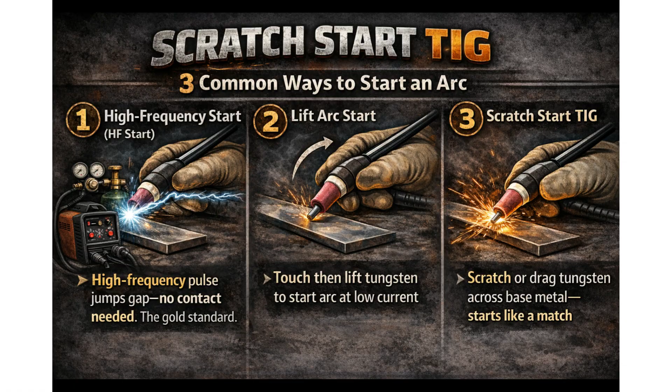Now, there are three common ways to start that arc. Number 1, high-frequency start, or HF start. The machine sends a high-frequency electrical pulse that jumps the gap between the tungsten and the base metal, no contact required. This is the gold standard.

Number 2, lift arc start. You touch the tungsten to the metal, then lift it away. The arc starts at very low current to protect the tungsten.

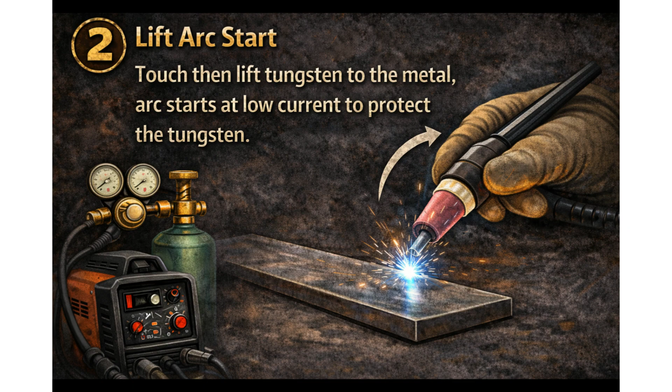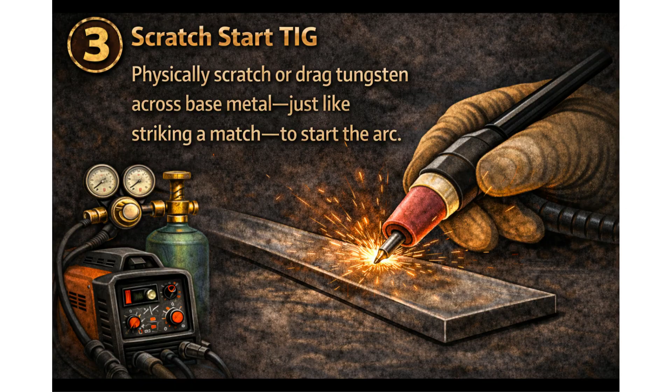And number 3, Scratch Start TIG. You physically scratch or drag the tungsten across the base metal, just like striking a match, to initiate the arc. Scratch Start is the most basic method and is typically found on simpler, less expensive machines, especially older stick welders with a TIG kit added on, or basic DC-only machines.

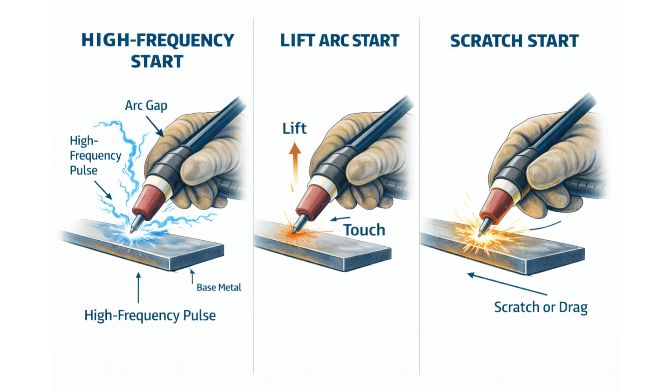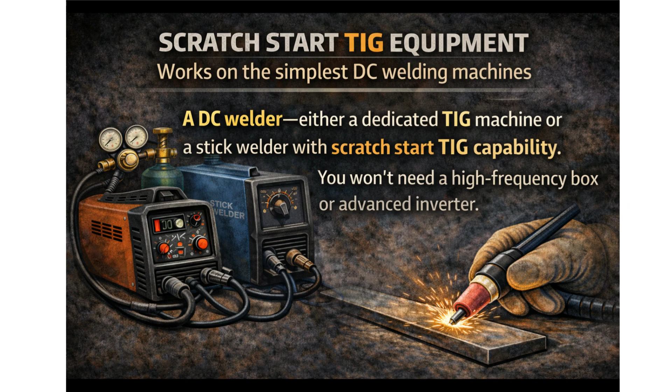Now let's talk equipment. Scratch Start TIG works on the simplest DC welding machines. Here's what you typically need. A DC welder, either a dedicated TIG machine or a stick welder with Scratch Start TIG capability. You won't need a high-frequency box or advanced inverter.

A standard TIG torch, usually an air-cooled torch like a WP-17 or WP-26. Shielding gas, most commonly 100% argon. Make sure your flow rate is set between 15 to 25 cubic feet per hour.

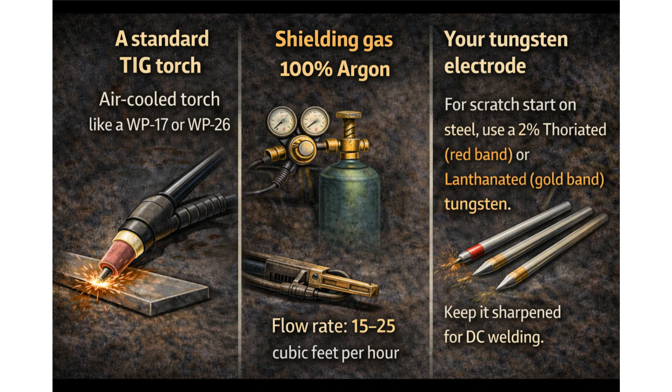And your tungsten electrode, for Scratch Start on steel, use a 2% thoriated, red band, or lanthanated, gold band, tungsten. Keep it sharpened to a point for DC welding. One important note, scratch starting will contaminate your tungsten tip more frequently, so always keep a grinder nearby.

So when should you actually use Scratch Start TIG? This is where it gets practical. Situation 1, you only have a basic machine. Not every shop or job site has a high-end inverter welder. If your machine only supports Scratch Start, you work with what you got.

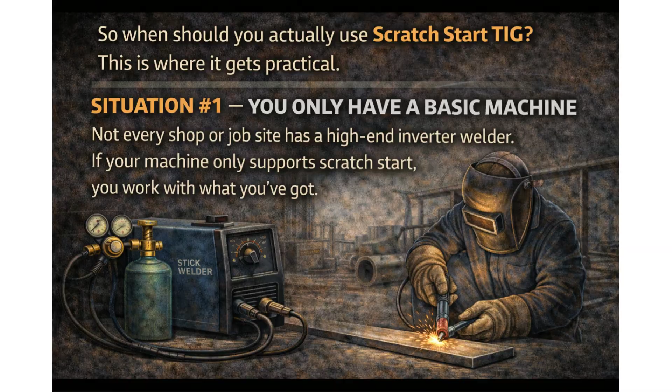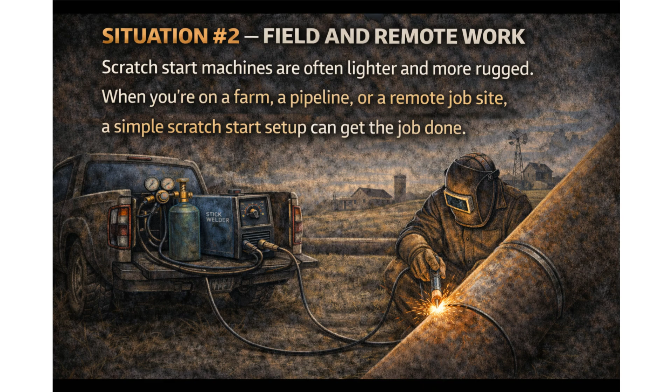Situation 2, field and remote work. Scratch Start machines are often lighter and more rugged. When you are on a farm, a pipeline, or a remote job site, a simple Scratch Start setup can get the job done. Situation 3, welding carbon steel or stainless steel.

Scratch Start TIG is perfectly adequate for steel and stainless. It's not recommended for aluminum. Aluminum requires AC current and HF start to prevent the oxide layer from ruining your weld.

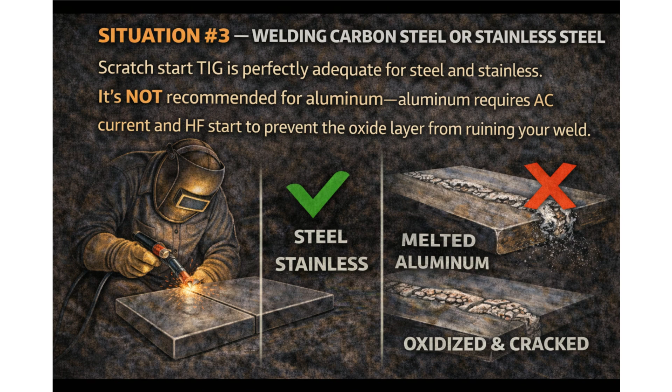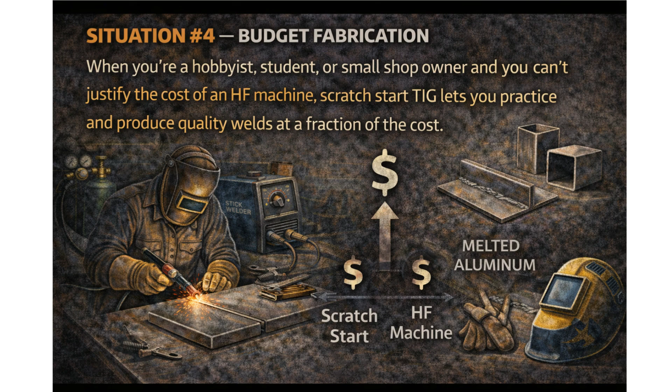Situation 4, budget fabrication. When you're a hobbyist, student, or small shop owner and you can't justify the cost of an HF machine, Scratch Start TIG lets you practice and produce quality welds at a fraction of the cost. The key takeaway? Scratch Start is a tool, not a handicap. Skilled welders have been making clean, precise TIG welds with Scratch Start for decades.

Alright, now the most important part. Here's exactly how to Scratch Start TIG weld, step by step. Step 1, prepare your material.

Clean your base metal thoroughly. Use a grinder, wire brush, or acetone to remove mill scale, rust, oil, and contaminants. Scratch Start TIG is less forgiving than HF, so clean metal is non-negotiable.

Step 2, set up your machine. Set your polarity to DCEN, direct current electrode negative. This puts the heat into the base metal, not the tungsten. Set your amperage appropriately. A good rule of thumb is about 1 amp per thousandth of an inch of material thickness. Turn on your shielding gas and set it to 15 to 20 CFH.

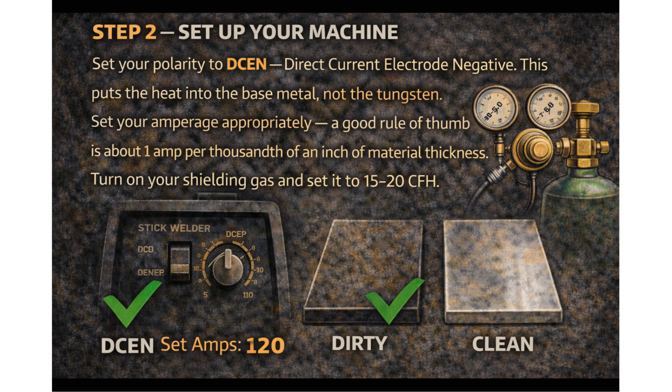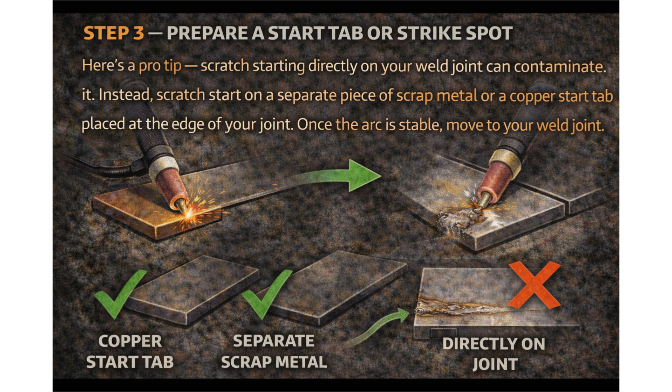Step 3, prepare a start tab or strike spot. Here's a pro tip. Scratch starting directly on your weld joint can contaminate it. Instead, scratch start on a separate piece of scrap metal or a copper start tab placed at the edge of your joint. Once the arc is stable, move to your weld joint.

Step 4, strike the arc. Hold your torch at roughly a 15-degree angle. Quickly scratch the tungsten across the metal surface, like striking a match, then immediately lift it to your normal arc length, about the diameter of your tungsten away from the work. Don't hesitate. A slow scratch will stick your tungsten to the metal.

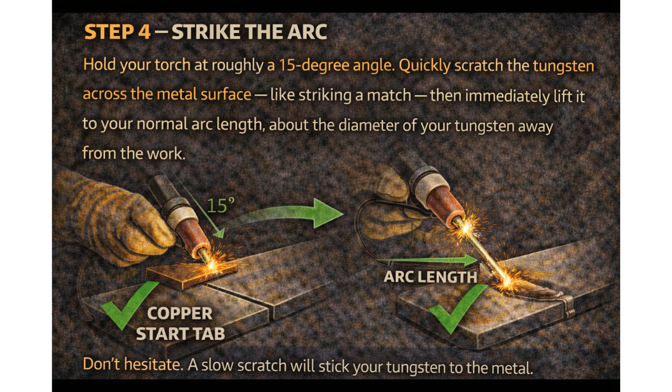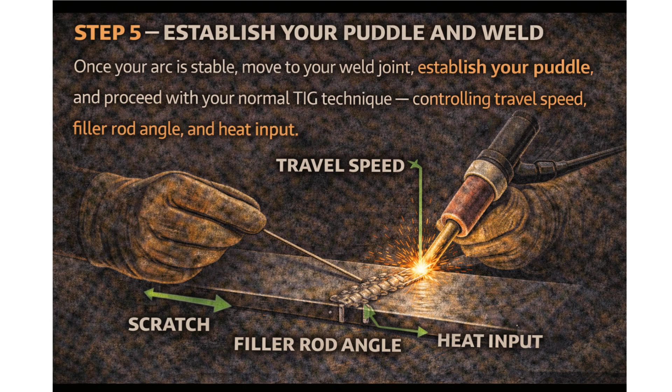Step 5, establish your puddle and weld. Once your arc is stable, move to your weld joint, establish your puddle, and proceed with your normal TIG technique, controlling travel speed, filler rod angle, and heat input.

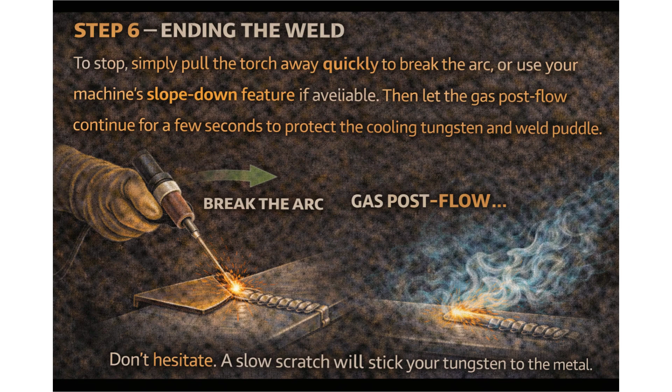Step 6, ending the weld. To stop, simply pull the torch away quickly to break the arc, or use your machine's slope down feature if available. Then let the gas post flow continue for a few seconds to protect the cooling tungsten and weld puddle.

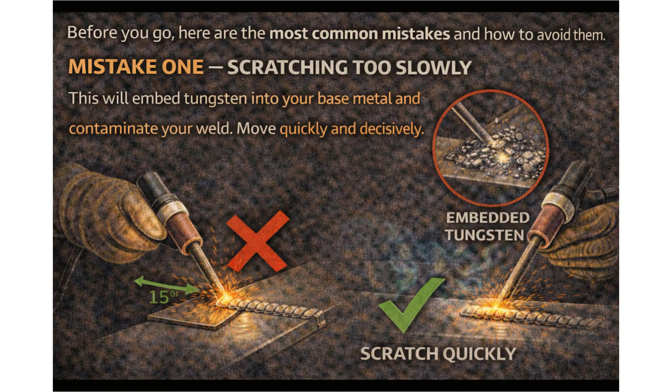Before you go, here are the most common mistakes and how to avoid them. Mistake 1, scratching too slowly. This will embed tungsten into your base metal and contaminate your weld. Move quickly and decisively. Mistake 2, starting directly on the weld joint. Always start on a tab or scrap piece nearby.

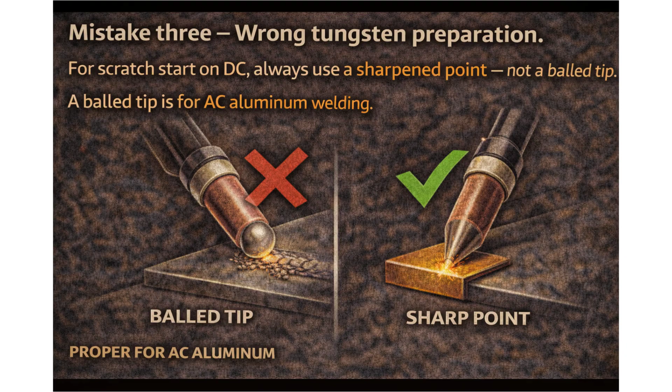Mistake 3, wrong tungsten preparation. For scratch start on DC, always use a sharpened point, not a balled tip. A balled tip is for AC aluminum welding. Mistake 4, forgetting post-flow gas. After breaking the arc, keep the torch over the weld for 5 to 10 seconds so the gas shields the cooling metal and tungsten.

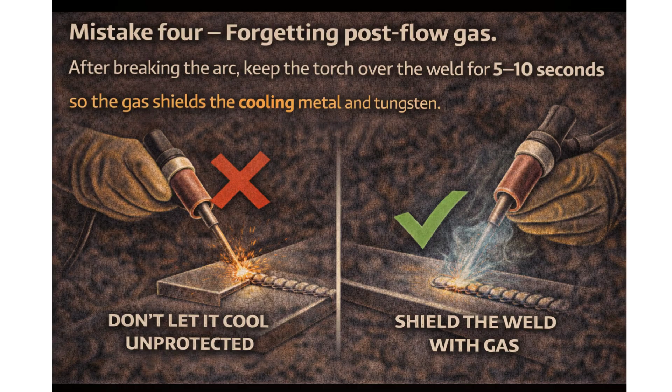And that's Scratch Start TIG, simple, rugged, and highly effective when you know what you are doing. Whether you're working with a basic machine or just want to understand your options, mastering Scratch Start makes you a more versatile welder.